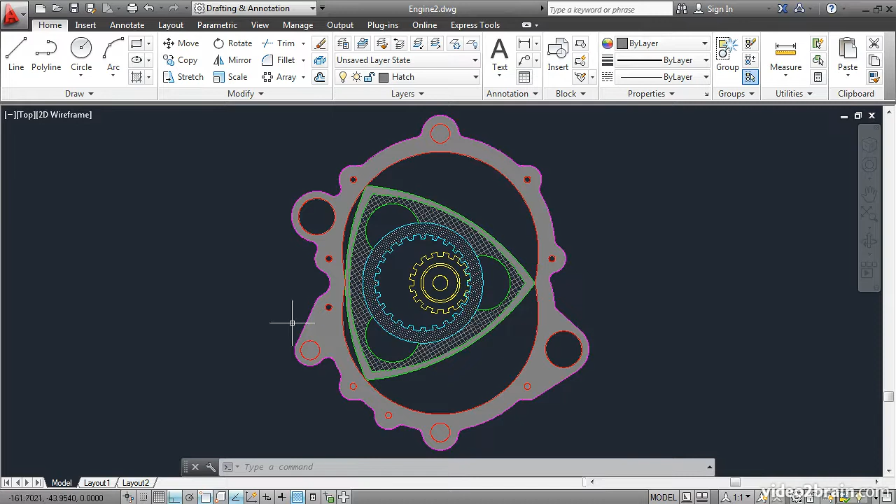Here you will edit existing hatch objects by selecting new boundaries, changing patterns, adjusting pattern scale, and setting the origin of a pattern. Open the Engine 2 project file and select this outer boundary. It appears that we're missing some of the circles. Let's reselect the missing boundaries.

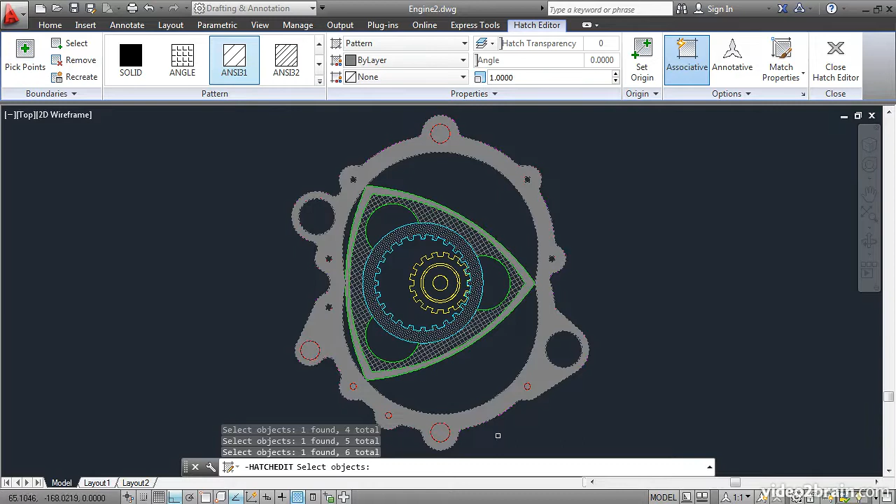Click Select, and then go around and select any of the circles which aren't part of the pattern. Note that you don't need to select the existing boundaries, just the additional boundaries. Press Enter, and the holes are cut in the pattern.

The next thing I'd like to change is the scale of this particular pattern. It's way too dense. Go up here and highlight this value. Let's increase it to 35. Press Tab. Now look at this, we have a problem. The hatch pattern isn't respecting this inner boundary.

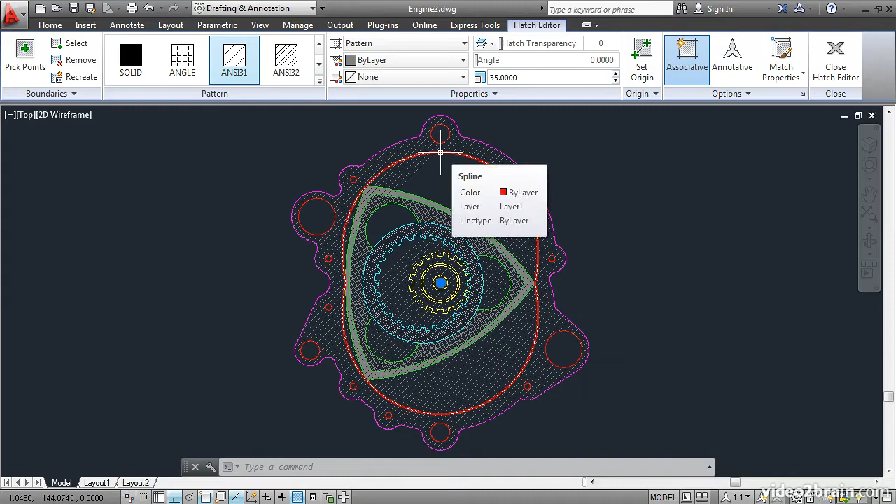This inner boundary is composed of two circles and two blended curves here and here. There aren't any gaps in the boundary, so this is really a bug in AutoCAD. This happens from time to time with complex boundary shapes. The solution is simply to change the scale until the problem goes away.

I'll click on this Hatch Pattern Scale Up arrow, and hopefully at some point, there we go, the boundary will be corrected. A value of 53 seems to work pretty well here. Let's change the hatch pattern next. Choose ANSI 32 for this steel pattern.

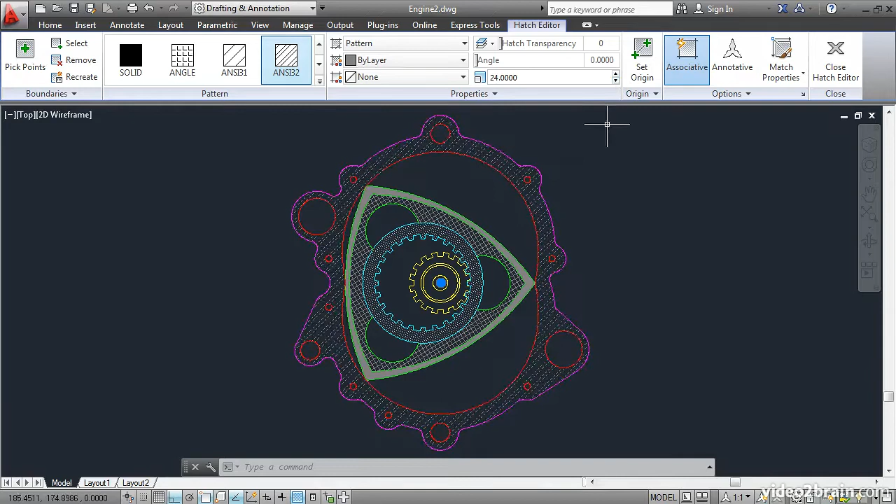And let's try a different scale. Maybe this pattern won't suffer from the same problem as ANSI 31. I'll decrease the scale, and sure enough, it does work. I'll bring it down to about 24, and then click Close Hatch Editor.

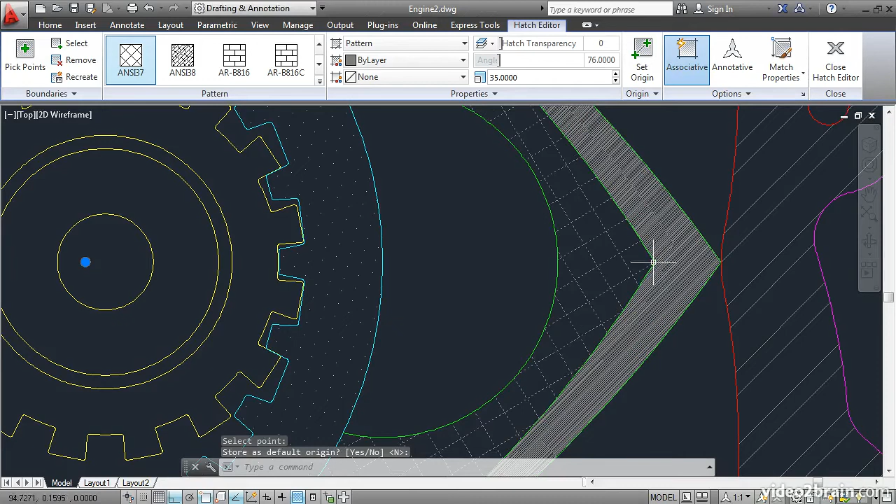Next, let's zoom in and take a look at the way that this hatch pattern meets the boundary. Let's say you want the hatch pattern to meet exactly at this point. You can do that by selecting the pattern and then choosing Set Origin here. Click the point you want the pattern to meet, and one of the lines hits that point precisely.

Click Close Hatch Editor. Now let's create a new hatch pattern and match it to an existing hatch. Click the Hatch tool on the Draw panel. Click the Select button in the Boundaries panel. Click this circle and this outer boundary, and then click Match Properties.

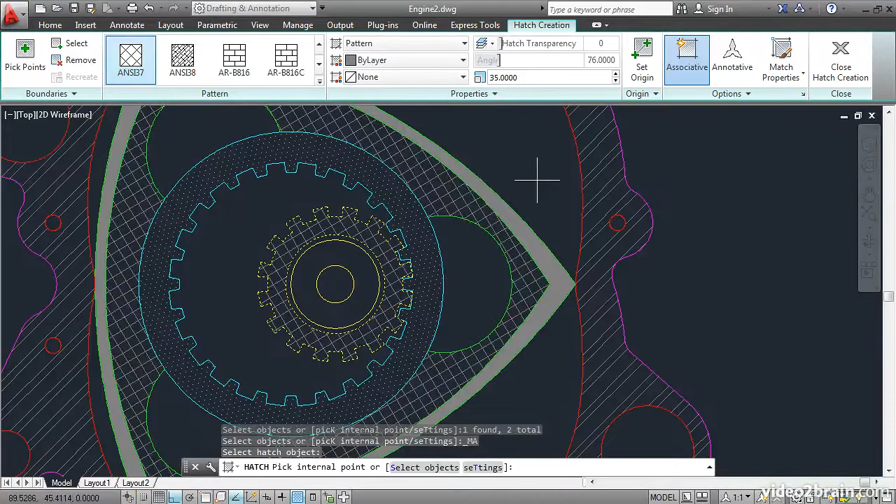Click on this hatch pattern, and you immediately match all the properties that are set for it. Click Close Hatch Creation. I don't think I like that because the cross-hatching pattern is interfering with the complexity of the gears.

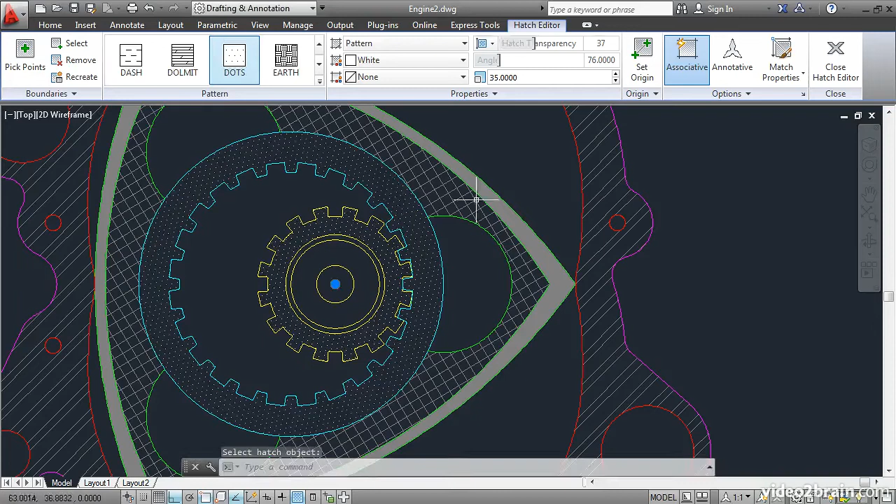So I'll select this pattern, and again, click Match Properties, and let's match the properties to a different pattern. Let's try this dots pattern. Now that looks better. I'll click Close Hatch Editor and Zoom Extents.

So you've learned how to edit existing hatches and have adjusted their boundaries, patterns, and properties. You also changed the origin point of a pattern and matched a new pattern to the properties of another existing pattern.